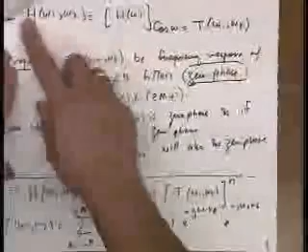So the basic transformation that I proposed, if you can bring the camera down here, okay, and do a rotation. The basic transformation that I proposed was something of this nature. We built the large two-dimensional filter that we're interested in by applying a transformation shown here to a one-dimensional filter.

The idea is that we're very good at designing 1D filters, we know it inside out. We have excellent optimal algorithms that help us design one-dimensional filters optimally. By optimal I mean, given a certain amount of ripple and cutoff frequencies, there are techniques that guarantee you the FIR filter with the lowest number of taps. So we're all good as far as designing h of omega is concerned.

So if we apply this transformation, T of omega1 and omega2 is the frequency response of a smaller filter, T of n1 and n2, given by this expression. Let's say we make T of n1 and n2 just a 3 by 3 filter, and apply this transformation, we get a big filter H.

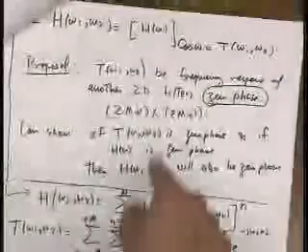We also went through the fact that if little t is zero phase, and if h of omega is zero phase, then H of omega1 and omega2 will be zero phase. And we wrapped up last time's lecture by writing down the steps necessary for designing 2D FIR filters.

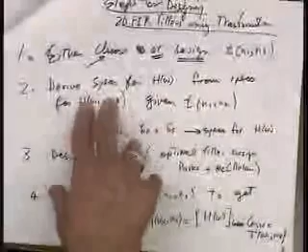So you start by choosing or designing little t — we'll do examples of both today. Given that little t, and given the specs for H of omega1 and omega2, specs stands for specifications, come up with the specifications for h of omega.

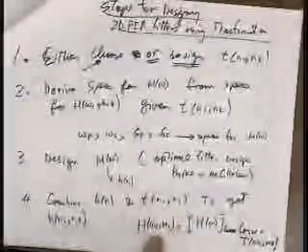Then, hallelujah, we know how to design h of omega even if the specs are tough. We can go to our Remez exchange algorithm in MATLAB and design h of omega given those specs. Then, once we have h of n, we combine it with little t to get the big H of omega1, omega2 using this transformation technique.

So what I'm going to do in today's lecture is first give you an example of these steps for a case where we choose T of n1 and n2 to be the McClellan transformation. McClellan not only came up with this design methodology — step 1, step 2, step 3, step 4 — but also came up with a particular transformation filter shown here, which obviously bears his name.

And this transformation is interesting — it's zero phase.

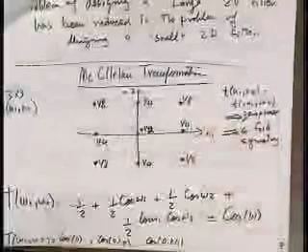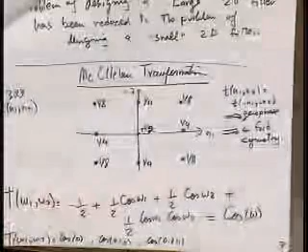It has real coefficients, it's symmetric, and it also has fourfold symmetry. Generally speaking, if this little t filter has fourfold symmetry in the omega 1, omega 2 plane, the chances are that because of the way we do the transformation, the big filter will also have fourfold symmetry. So a lot of the cues as to how the big filter should perform can be translated down to how the little filter looks. In essence, we've transformed the problem of solving a big problem into a little problem, which is designing this T guy. Let me give you an example where this is used.

Okay, if you can just bring that in, thank you. So, example of 2D FIR filter design using the transformation scheme.

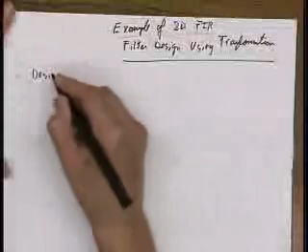Let me see if I can get a slightly better pen here. So suppose that we're asked to design a low-pass filter, LPF, which is supposed to be circularly symmetric. In other words, it's going to have contour requirements as a function of omega 1 and omega 2.

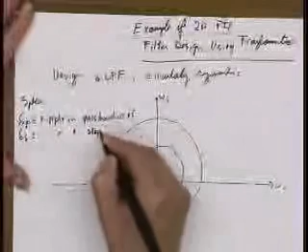It's going to have specs as follows: delta p, the ripple in the passband, is 0.05. Delta s, the ripple in stopband, is 0.025. And C sub p, the passband contour, is just a circle of radius 0.4 pi. C sub s, the stopband contour, is also a circle, of radius 0.5 pi. So this is C sub p here, this is C sub s, a circle of radius 0.4 pi, and a circle of radius 0.5 pi.

Pictorially, the passband looks like this, and the stopband is this region. So we want this filter to pass signals in this frequency band and stop signals in this frequency band.

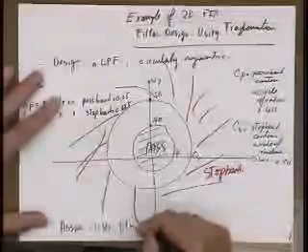In this example, we're just going to follow the steps I just talked about, but we're not going to design T of N1 and N2, the transformation filter. We're just going to assume that the McClellan transformation I showed you is good enough. So what we're going to do is use T of N1 and N2 to be the McClellan transformation.

If you can roll up, please, that'll be good. So our next step is: given this set of specifications in 2D, we have to transform the specs into 1D and figure out what our specifications for our 1D filter h of omega should be. So the goal here is to transform these specs from 2D to 1D. How do we go about doing that? Well, remember what our transformation is.

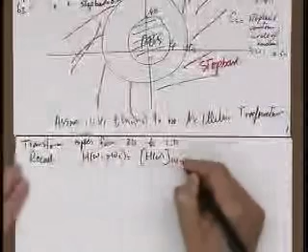It's h of omega 1, omega 2 equals h of omega. Let me write this down. So recall, instead of just talking about it, h of omega 1 and omega 2 is just h of omega with cosine omega replaced by T of omega 1 and omega 2. So what does that mean?

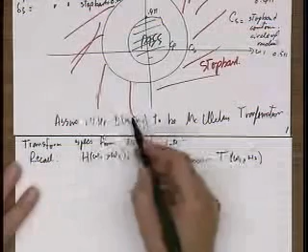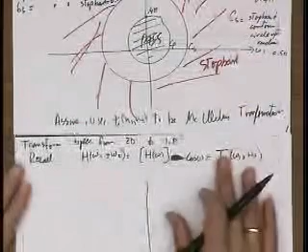Well, it means that, given T to be this McClellan filter, this 3x3 McClellan transformation I talked about, I can plot the isocontours of T of omega 1, omega 2. Okay, so here's...

I'm just kind of exaggerating the amount of wiggles I'm introducing. So for example, this is the isocontour corresponding to 0.1 pi. This is the isocontour corresponding to 0.2 pi. This is 0.3 pi. This is 0.4 pi. And this would be the isocontour corresponding to 0.5 pi.

Those are isocontours of capital T. Yeah, because remember, we've nailed T of N1 and N2 to be this filter, with these taps. So if I plug it into T of omega 1 and omega 2, I get an expression: minus 1/2 plus half cosine omega 1 plus half cosine omega 2 plus 1/2 cosine omega 1 cosine omega 2, equals cosine omega. Because I've nailed my little t to be these, I have an expression for T of omega 1 and omega 2.

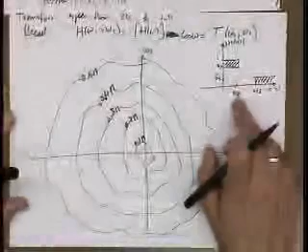So the question I'm asking is how should I pick omega p and omega s? What values should I have? Clearly those need to be influenced by the requirement of my 2D filter. I need to design a lowpass filter where a circle of radius 0.4 pi is my passband. That means I need to ensure the ripple inside a circle of radius 0.4 pi does not exceed 0.05.

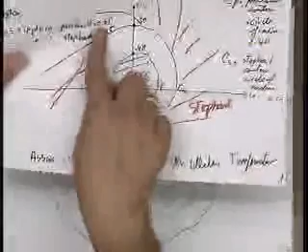So let me for simplicity superimpose this circle of radius 0.4 pi, which I also call c sub p, and also a circle of radius 0.5 pi, which I call c sub s. Superimpose that on top of this diagram. Let me do that in a proper way.

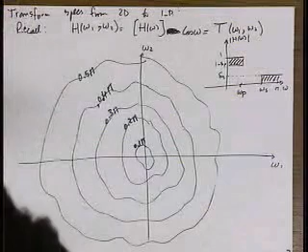Okay, so let's say, I'm going to just draw this randomly. This is c sub p, and this is c sub s. So how should I pick omega p and omega s? Well, these are just circles.

So how should I pick omega p and omega s? Well, clearly I want to pick omega p in such a way that the contour for my h of omega, the contour that corresponds to cosine omega p, is entirely outside of c sub p.

So let me write that down and then I'll justify it. I have to choose omega p in such a way that the isocontour corresponding to omega p is entirely outside c sub p. And why is it that I want to do that?

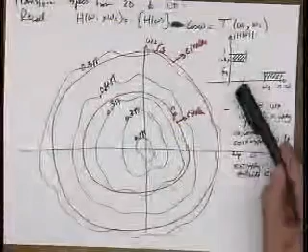Well, because if I pick my omega p that way, and if I make sure that for my one-dimensional filter between 0 and omega p, the filter takes on values between 1 and 1 minus delta p, then by picking omega p to enclose c sub p, I can make sure all points inside c sub p will also have ripple between 1 and 1 minus delta p. Remember, the significance of c sub p is that we need all points inside it to have ripple between 1 and 1 minus delta p.

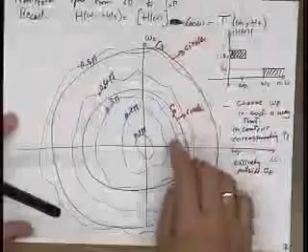So if I pick omega p such that the contour corresponding to it is sometimes inside c sub p and sometimes outside, there might be points inside c sub p that won't satisfy this requirement. So to ensure all points inside the isocontour corresponding to omega p are between 1 and 1 minus delta p, I have to make sure that isocontour completely encircles c sub p. Is that clear? That's the only way I can be sure all points inside c sub p satisfy this constraint.

Question? Yeah, I totally follow what's going on here, but I feel like there wasn't enough motivation leading me to believe this is really going to work. We just talked about this McClellan filter as the ideal case, and... I don't know. The McClellan filter is just one example, and in five minutes I'll give you another example. We don't even start with that—we designed that filter from scratch ourselves, the little transformation filter.

Okay, let me go through this example. Are you trying to say you feel the McClellan filter was pulled out of some hat? Well, is that the problem you have? I'm not saying pulled out of a hat necessarily, but maybe it was kind of a hand wave. Well, in a minute we're just going to throw that away and systematically design our own 3x3 filters, which doesn't even come from McClellan. It's just that McClellan used this in his classic paper as an example. So first we have to start walking before we start running.

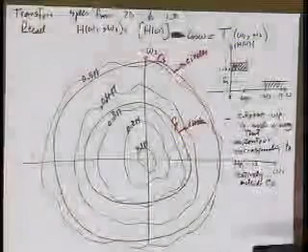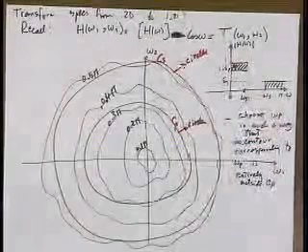You want to pick omega s such that the isocontour corresponding to cosine omega s is barely inside C sub s. In other words, C sub s encircles the cosine omega s. Similarly, choose omega s so that the isocontour corresponding to omega s is barely inside C sub s.

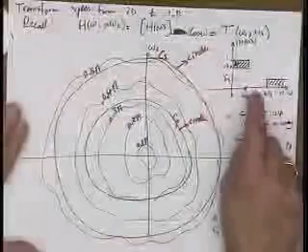The truth is that I can pick omega s to be really small, so what I want to do is pick the largest possible omega s. If I pick omega s too small, I can easily be inside C sub s, but then omega s becomes very close to omega p, making the transition band of my one-dimensional filter really small. That makes the specifications for h of omega very tough, resulting in a long filter. So I want to choose the largest possible omega s so that its corresponding isocontour is barely inside C sub s, without any portion of it getting outside C sub s.

Why is that necessary? Because we want to make sure that for all omegas larger than omega s, our one-dimensional filter will have a ripple smaller than delta s. By doing that, we ensure all points outside the contour corresponding to cosine omega s have ripples smaller than delta s. Because we've chosen C sub s to be outside the isocontour of omega s, all points outside C sub s will also have ripples smaller than delta s.

Again, you want to pick the largest omega s, because if you pick a rather small one, you can satisfy the contour being inside C sub s, but you don't want omega s to come too close to omega p, because that's detrimental. This is the key point of almost all of today's lecture. If you understand this, the rest of the lecture is self-explanatory.

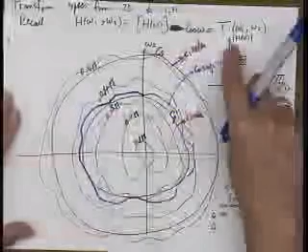So I want to pick omega p, using a different color. I want to pick omega p such that, for example, this happens—it could touch. This is my cosine omega p contour, and I'm designing it so it has to encircle C sub p. Because inside C sub p, everything has to be between 1 and 1 minus delta p. By making the contour cosine omega p encircle C sub p, everything inside the blue contour will also be between 1 and 1 minus delta p.

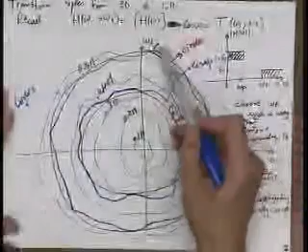As far as the second requirement is concerned, I'm exaggerating here, but bear with me. I want to pick an omega sub s that is just barely—this is the contour corresponding to cosine omega s—such that omega s is large enough to increase the distance between these guys. Because outside of C sub s I'm required to have ripple of delta sub s, by making cosine omega s this way and ensuring that outside of omega s everything is smaller than delta s, I've automatically ensured that everything outside C sub s also has ripple of delta s.

So once we pick the contours that are either inside or outside the pass band or stop band contour, how do you make them have the small ripple that they need? We're getting there. You mean for the two-dimensional filter?

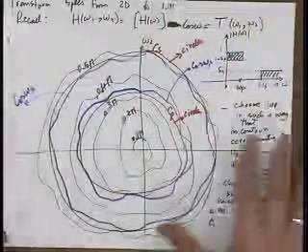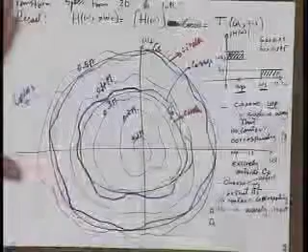Well, the next steps are we pick omega p, we pick omega s this way, and now we have the necessary specs for our H of omega. We know omega p and omega s, and delta p and delta s are going to be the same delta p and delta s from our two-dimensional design. So if delta p here was 0.05 and delta s was 0.025, then we pick delta p to be 0.05, the same as our 2D filter, and delta s is 0.025, the same as from our two-dimensional filter. Now we have the complete set of specifications for H of omega, our one-dimensional filter.

And we can just plug it into the MATLAB one-dimensional optimal filter design routine. You input delta p, delta s, omega p, omega s into the MATLAB one-dimensional filter, and it spits out the FIR filter coefficients for H of omega that satisfies the specs for the one-dimensional case.

So for our example, let me come back here. For this example, the one-dimensional specs are as follows: H of omega, there's an omega p and an omega s. For omega p we need to have this kind of spec, and for omega s all the way to pi we need to have this kind of spec. So delta p is...

Again, we choose the delta p for our one-dimensional filter to be the same delta p as we wanted for our two-dimensional filter, which is 0.05. It's from our 2D spec. And delta s is 0.025, also from our 2D spec.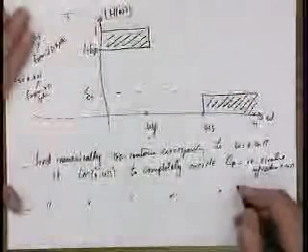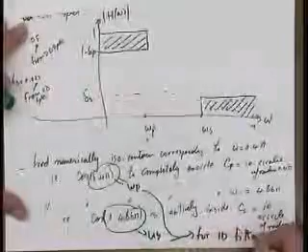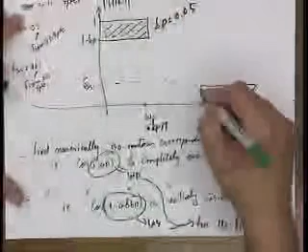And then also find numerically the isocontour corresponding to omega equals 0.486 pi, i.e. cosine 0.486 pi, that is entirely inside C sub S, i.e. a circle of radius 0.5 pi. So this and this are our omega p and omega s for our one-dimensional filter: 0.4 pi and 0.486 pi. And delta p we've already decided is 0.05, and delta s is 0.025.

Now, given all of these things, we can design H of omega using any of your favorite techniques. For example, you can use the Remez exchange algorithm from MATLAB. I'm not sure if MATLAB calls it optimal FIR filter design or Remez exchange algorithm, but they're the same thing. So when I say design H of omega, I mean design H of n, figuring out the filter tap coefficients for our one-dimensional filter H of n.

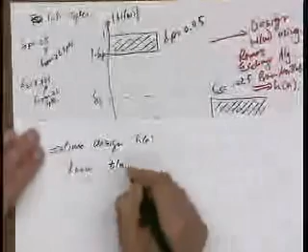And once we have H of n, we can combine it with T of n1 and n2. So once we design H of n and we know T of n1 and n2, we combine these two things together to get H of n1 and n2. The way you do it: by the basic relationship, H of omega 1, omega 2 equals H of omega with cosine omega replaced by T of omega 1 and omega 2. So we know this, plug it into this, and you get H of omega 1, omega 2, and from that you compute the coefficients.

And just to show you that this technique works, for this example, the particular filter that we get - first of all, the isocontours of T of omega 1 and omega 2 look like this. So instead of my stupid hand-drawn thing, this is actually accurate, computer-generated.

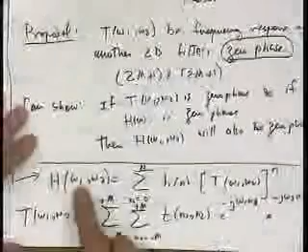We did that last time. Let me flash it on so that you remember it. So if you can zoom in here—this is our h. Let me go back a few steps.

This was our h in terms of the little h's. This is then when we took advantage of the symmetry in h, because we wanted h to be zero phase, to write it down as this. Then we wrote it down as a of n times cosine omega n. Then we wrote it down as b of n times cosine omega to the power of n. You can see how a and b are related, because these are Chebyshev polynomials, and you can write down cosine of omega times n in terms of a polynomial in powers of cosine omega. You can look that up in any textbook or CRC handbook—we went over the Chebyshev polynomials.

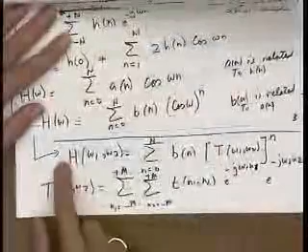So combining all of those things together, you can write down—combining this expression with this expression—you can replace the cosine omega with t, right? So now h of omega 1, omega 2 is related to this thing.

So if I know my h, I know my a's. If I know my h of n here, that lets me know what my a's are. If I know my a's, I know what my b's are, because these are Chebyshev polynomials and those are known. And if I know my b and I plug it in, and if I know my t—because t of omega 1, omega 2 is related to t—if I know my b's and my t's, I can compute what h of n1 and n2 is. Essentially by equating the powers of e to the minus j omega 1 on the right hand side with e to the minus j omega 1 on the left, and vice versa. Is that clear?

Okay, any other questions? Okay, so let's now move on to the slightly more complicated case—example 2. I'm going to use this.

So example 2 for FIR filter design. In this example we want to make a note of the following observation: the shape of the contour for T of n1 and n2, i.e. the shape of the contour for T of omega 1 and omega 2, that transformation filter, is very similar ultimately to the shape of the ultimate filter H of omega 1 and omega 2 we're going to have. Let me see if I can motivate that by showing a picture.

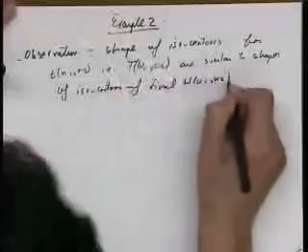And so this motivates us to think: if you don't want to use the given McClellan filter, how do we design T of n1 and n2? So how to, from scratch, design T of n1 and n2.

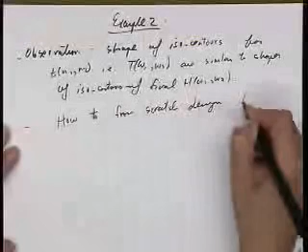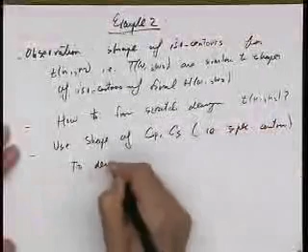And the answer is: use the shape of C sub P and C sub S, that is the specification contours, to design T of N1 and N2. That's the general idea.

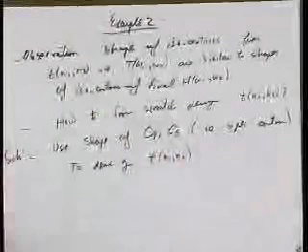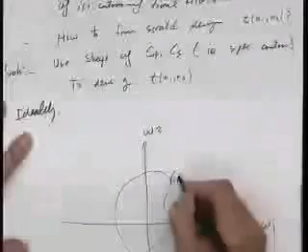So how do we go about doing this? Well, ideally speaking, this is again under ideal conditions. What we want is: if you have omega 1, omega 2, and some sort of C sub P and some sort of C sub S with delta P specification here, delta S specification here, ideally you want the contour corresponding to cosine omega p, and if the one-dimensional filter that we design, H of omega, is going to have something called omega p and omega s, like this.

Ideally, what we want is that cosine omega p be equal to the transformation T of omega 1 and omega 2. We want this relationship to hold true for all omega 1 and omega 2 in C sub P, in this contour. So this is ideally. Furthermore, ideally we want the same thing to hold true at the stopband: cosine omega s, which is T of omega 1 and omega 2. We want that to hold true for all omega 1 and omega 2 in C sub s.

So in other words, we don't want to play this game of choosing cosine omega p with omega p such that the contour corresponding to cosine omega p is entirely outside C sub p. We want this blue curve to entirely coincide with the red curve, the C sub p curve. And we want this other blue curve here, the cosine omega s contour, to entirely coincide with the C sub s contour, the red circle.

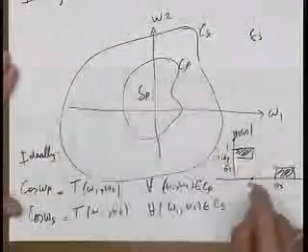Of course, that's a bit of wishful thinking, but that's what we're trying to strive towards. And in addition, not only do we want cosine omega p to correspond to this and cosine omega s to correspond to that, we want all the points inside the passband contour to correspond to values of omega between 0 and omega p. So furthermore, let's roll up just a little bit.

So furthermore, it would be nice, I'm not saying we could have it, but it would be nice if we could have the following relation hold true: for cosine omega, for omega between 0 and omega p, we want T of omega 1 and omega 2 for all the omega 1s and omega 2s inside C sub p to correspond to omega values between 0 and omega p.

What I'm trying to say is that as I traverse my omega axis from 0 to omega p, I want all these frequency points in one dimension to correspond to all the omega 1s and omega 2s inside c sub p.

Not only do I want cosine omega p to correspond on the contour to c sub p, and this isocontour to be the same as c sub s, I want all the points inside c sub p to only correspond to 0 and omega p, and all the points

outside c sub s here to correspond to omega ranging between omega s and pi. So let me write that down also. I want all the cosine omegas for omega between pi and omega s to correspond to values of omega 1 and omega 2, where omega 1 and omega 2 are outside c sub s.

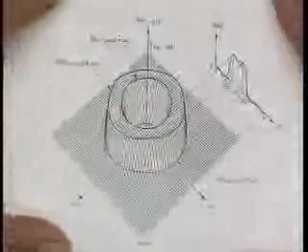So pictorially, maybe I can show this figure, zoom in as much as you possibly can. I realize this is a bandpass example, and what we're talking about is a low pass, but nevertheless it drives the point. So this is h of omega as a function of omega. This is the omega 1, omega 2 plane. This is a two-dimensional filter that we design, right?

Basically, with the transformation design, for example, the contour corresponding to omega naught prime in this figure, shown by g of omega 1 omega 2 equals omega naught prime, which is this contour here, they're all going to take on the same value as omega naught prime as h of omega took at omega equals omega naught prime.

Furthermore, if I go to omega 1 prime, which in 2D corresponds to this other contour shown here, all these points are going to take on the same height as h of omega did at omega 1 prime. Hopefully all the frequencies between omega naught prime and omega 1 prime, all the isocontours in between are going to correspond to the isocontours in here. And so the height variation in between these contours here is going to correspond to the height variation in h of omega here. Is that clear?

This actually has nothing to do with the point I was talking about earlier. It's just a nice figure that I feel sorry not to have shown. I should have probably shown it right at the beginning of the class, or even—yeah, question.

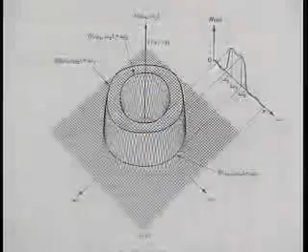Yeah, essentially that's what's happening: the transformation is cosine omega, isocontours corresponding to cosine omega equals this thing is going to have the same height variation. Exactly, the height variation here is going to be reflected by the height variation here. And how that is, is through the isocontours given by cosine omega equals T of omega 1 and omega 2, right?

So that's why the shape of the contours here is very much dominated by the shape of the contours in T of n1 and n2. It's just as to which contour corresponds to what value, what height, that's what h of omega dictates through that relationship, cosine omega equals T of omega 1 omega 2.

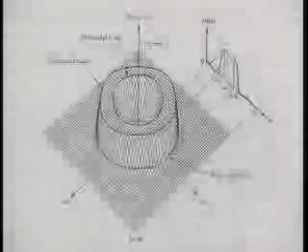This is just a nice picture. It doesn't directly correspond to what I was talking about. I think it's never too late to talk about it though. Is the point I was making clear here?

For example, omega 2 prime, which corresponds to this isocontour here, the height of that isocontour for the two-dimensional filter is the same as the height of h of omega at omega 2 prime, which is a small value. So that's why this is low here.

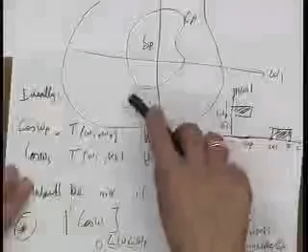Coming back to this, what I'm arguing is that in this general picture, it would be good if the cosine omega p isocontour exactly matches C sub p, and the cosine omega s contour exactly matches C sub s. All points between 0 and omega p correspond to inside of C sub p, and all points between omega s and pi correspond to the contours outside of C sub s. These are all nice things to have, but let's stop daydreaming.

So the question is, given all these niceties, how do we design T of n1 and n2 to make all these nice things happen? This is the degree of freedom we have. The coefficients of T of n1 and n2 are the knobs we can turn to make some of this wishful thinking come true.

Here's my four-point proposal for designing T of n1 and n2. So, steps for designing T of n1 and n2, assuming that we don't want to use a canned McClellan filter. We don't want to use a brownie mix or a chocolate chip cookie mix. We want to design it from scratch, whatever that takes. I'm afraid I don't really know what goes into any of those mixes, so I can't give you a good analogy. I think it's flour. Must be flour.

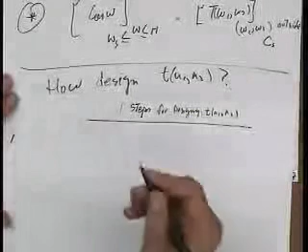Step 1.1: assume some sort of shape, size, and region of support for T of n1 and n2. This could come from the specs. For example, we might want to say, okay, we're just going to make T to be 3 by 3 and no more than that, and we're going to make it symmetric or have fourfold symmetry. If our final filter is going to have fourfold symmetry, we might as well make T have fourfold symmetry.

Then step 1.2: impose a certain amount of constraints, and what that does is reduce the number of unknowns. I'll go through a concrete example to show this in just a second.

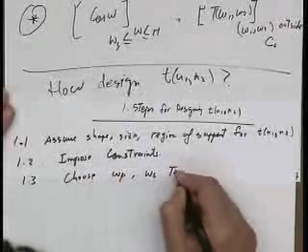Step number 3: choose omega p and omega s tentatively in our 1D design, such that cosine omega p is approximately equal to T of omega 1 and omega 2 for all omega 1 and omega 2 in C sub p. It can't be exactly, but approximately. And such that cosine omega s is approximately equal to T of omega 1 and omega 2 for all omega 1 and omega 2 in C sub s. So these two are two of our requirements in our wish list.

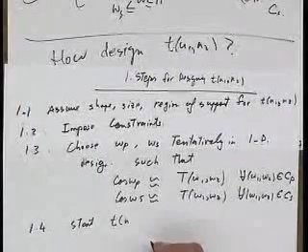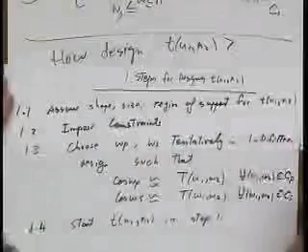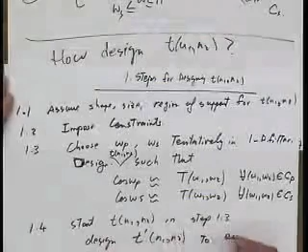And step 1.4: start with T of n1 and n2 from step 1.3. To choose omega p and omega s points tentatively in our 1D filter design, design T of n1 and n2 such that this relationship holds true. So coming out of step 1.3, you already have a tentative design for T of n1 and n2. Then start with that T of n1 and n2 and design a slightly modified version of it, which I call T prime of n1 and n2, to ensure that those starred relationships in my wish list are satisfied.

This looks awfully abstract, so before it scares the daylight out of you, let me give you an example to make this a bit more concrete.

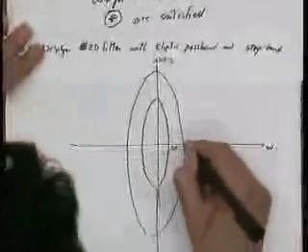Here's an example. Suppose that I want to design a 2D filter with elliptic passband and stop bands. My specs in the omega 1, omega 2 plane will look like this: 0.5 pi here, 0.6 pi here, 0.6 pi here, and 0.7 pi here. I can already understand why you'd want to shoot me, because my figure is entirely out of scale, but just bear with me. Pretend these are ellipses -- if this is 0.5 pi, that's not 0.6 pi, but just pretend it is. Delta p is 0.08 and delta s is 0.08, and this is our 2D spec.

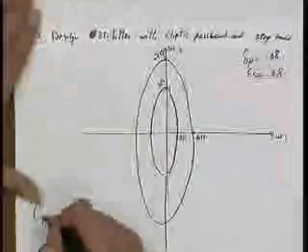Mathematically, C sub p is given by an ellipse with major and minor axes given by 0.5 pi and 0.6 pi, so it's omega 1 over 0.5 pi squared plus omega 2 over 0.6 pi squared equals 1. And C sub s is omega 1 over 0.6 pi squared plus omega 2 over 0.7 pi squared equals 1. So these are the mathematical shapes of our contours. That's it.

This is the spec, and we're now going to go through steps 1.1 through 1.4 to design the T that does the job with this thing, and ultimately to design the H of omega 1 and omega 2 that does the job with this. So if you can roll up, please.

So what do we do next? Well, start with step 1.1. Assume some sort of a shape, size, and region of support for our T of n1 and n2. We're going to assume the region of support is 3 by 3. That means we have 9 unknowns.

And if I were to, as a function of n1 and n2, write down the coefficients for T, I'm going to have 9 unknowns that I call A, B, C, D, E, F, G, H, and I. So you can imagine I would have A, B, C, D, E, F, G, H, I, just nine coefficients for different values.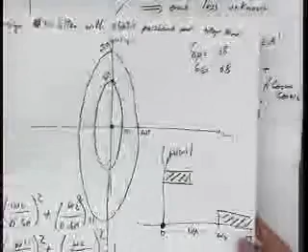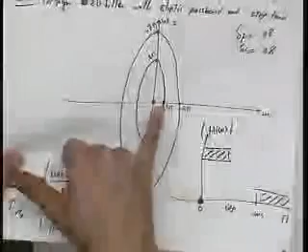Moving to step 1.3, which is: choose omega p and omega s in 1D kind of arbitrarily. Staring at this diagram, what do you think we ought to pick for omega p and omega s? How about if I just pick omega p to be 0.5 pi and omega s 0.6 pi? I could also go omega p 0.6 pi, omega s 0.7 pi. It doesn't make too much of a difference. But for the sake of argument, say we pick omega p to be 0.5 pi and omega s to be 0.6 pi.

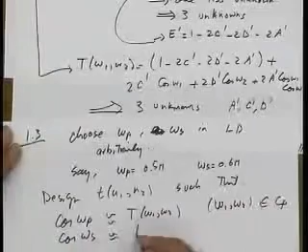Step 1.3 says after you pick these omega p's and omega s's, design T such that these two conditions hold true. In other words, the isocontour at omega p corresponds to the passband contour C sub p, and the isocontour at omega s corresponds to all the points in omega 1 and omega 2 that are members of the stop band C sub s. So design T of n1 and n2 such that cosine omega p is approximately T of omega 1, omega 2 for all omega 1, omega 2 in C sub p, and furthermore cosine omega s is approximately equal to T of omega 1, omega 2 for all omega 1, omega 2 in C sub s.

This is my wishful thinking part, the daydreaming part. How do I go about doing that? It's a standard technique in optimization. I'm going to come up with an error term, error sub p, E sub p, which is the difference between this and this squared, integrated over omega 1 and omega 2 along this contour, to be minimized. So I want to minimize an error defined as the double integral of the square of the difference between T and cosine omega p, over d omega 1 d omega 2, where this double integral is over a particular contour, omega 1 and omega 2 in C sub p. For all the points on the passband contour, you want to minimize this quantity. Why am I squaring it? Because if I don't square it, the pluses cancel the minuses, and the two things won't be close to each other. Standard practice, and this makes me get close to satisfying the top condition.

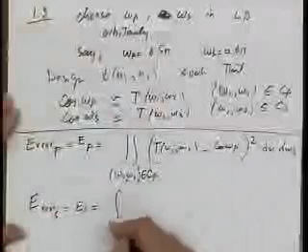And for the bottom condition, I can do the similar thing. Error sub s, E sub s, is the double integral over omega 1 and omega 2 in C sub s of the same thing squared, d omega 1 d omega 2, where it's T of omega 1, omega 2 minus cosine omega s. I'm going to convince you this is not a very difficult optimization job. If I want to minimize error sub p and error sub s, with respect to what?

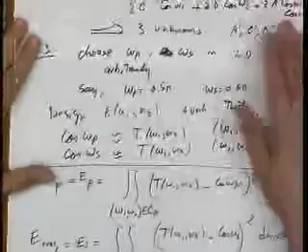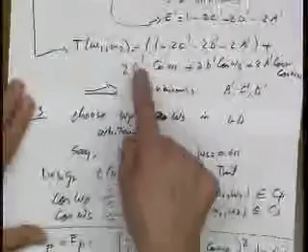My unknowns are A prime, C prime, D prime. Remember, T of omega 1 and omega 2 is linear in terms of A prime, C prime, and D prime. So if I have a quantity that I want to minimize, essentially I want to minimize E sub P and E sub S with respect to A prime, C prime, and D prime. These are my unknowns, right? That's the only knobs I have to change. I have no other control over the universe other than A prime, C prime, and D prime.

And how does one minimize something with respect to something else? You take the derivative and set it equal to 0. So what that means is that dEP over dA prime is equal to 0. dEP with respect to dC prime is 0. dEP with respect to dD prime is equal to 0, the partials. And the same thing for E sub S. dE sub S dA prime is equal to 0. dE sub S dC prime is equal to 0. dE sub S dD prime is equal to 0.

And the next question you ask yourself is, well, is that an easy optimization to do? I'll argue that it's extremely easy. Why? Because T is linear in A prime, C prime, D prime. If you don't believe it, stare at this. T is linear in C prime, D prime, A prime. In other words, there's no C prime squared, no D prime squared, no A prime squared, not even A prime times D prime. There's no square root of A prime. It's linear in A prime, right? And C prime and D prime.

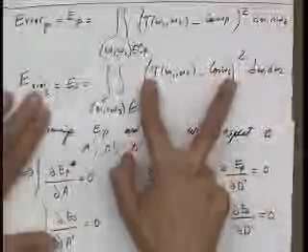Therefore, this quantity inside the parentheses here is quadratic with respect to A prime, C prime, D prime. And if I take the derivative of this term with respect to A prime, because of the linearity, I can bring the derivative of E sub P inside this integral. So if this thing is quadratic in A prime, C prime, D prime, and I take the derivative with respect to A prime, C prime, D prime, that thing is going to be linear in A prime, C prime, D prime. If something is quadratic, quadratic means power of 2. If this quantity here is quadratic in A prime, C prime, D prime, and I take the derivative with respect to them, the final answer is going to be linear in A prime, C prime, D prime.

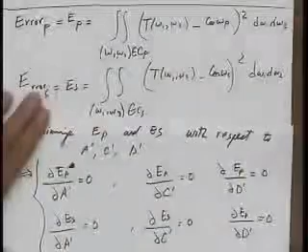And therefore, if I'm setting this thing equal to 0, the derivative of E sub P equal to 0, it's a linear term equal to 0, another term equal to linear term equal to 0. So at the end, I have a linear system of equations that I'm setting equal to 0, and that's very easy to solve. So let me provide you with a little bit more detail. Did everybody follow that intuitive discussion?

Okay, so let's just write that down. We know that T of omega 1, omega 2 is linear in A prime, C prime, and D prime. And therefore, T of omega 1 comma omega 2 minus cosine omega P squared is quadratic in A prime, C prime, D prime.

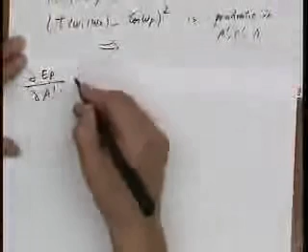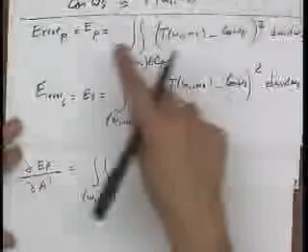What that means is that dEP dA prime is equal to the double integral of omega 1 and omega 2. So remember, I'm taking a derivative of E sub P with respect to A prime. I can just bring in the A prime as T of omega 1, omega 2 minus cosine omega P squared, d omega 1 d omega 2. And I can apply now the chain rule.

dEP dA prime is equal to, this is omega 1 and omega 2 in C sub P. So it's double integral of omega 1 and omega 2 in C sub P. So how do I take the derivative of that? Well, it's twice T of omega 1 comma omega 2 minus cosine omega P, and then times the derivative of this thing coming down here, d omega 1 d omega 2.

So because T is linear with respect to A prime, I'm going to make all my arguments with respect to A prime. The same thing holds true about C prime and D prime, all of these things, and the same thing holds true about E sub S. Because T is linear with respect to A prime, that means that d/dA prime of that thing is a constant.

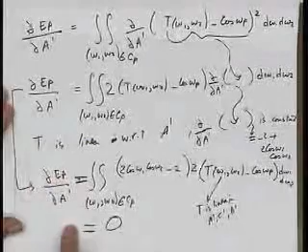I have 6 of them. Why? Because I have dEp over dA prime, dC prime, dD prime, that's 3 of them, and then E sub S, so that's 6 total. So bottom line is that I have 6 linear systems of equations, and how many unknowns? 3 unknowns.

And how do I solve that? Apply linear least squares, right? Because it's overdetermined. So apply some sort of simple method like linear least squares, and that gives you A prime, C prime, D prime.

And then from there you can get E prime, from there you can get D prime, then from there you get T of omega 1 and omega 2. I'm not going to be able to finish this argument here, but the reason I have to at least give you a one-minute explanation is why we're not done, why there's a need to go to step 1.4, which is refining T. And the best way to do that is for me to just show you the isocontours corresponding, for this example anyway, to T of omega 1 and omega 2.

And it's shown here. If you can zoom in, please. Zoom in. Okay, great. So now that I computed my T of omega 1 and omega 2, my transformation is: cosine omega, h of omega 1 omega 2 is equal to h of omega, where in h of omega I replace cosine omega with T of omega 1, omega 2, right?

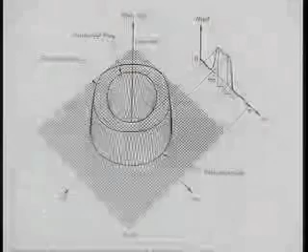...of my final h of omega 1 and omega 2. And if there are some points in this two-dimensional frequency plane, omega 1 and omega 2, that don't correspond to any omega here, all hell could break loose there. The height for these guys can be anything. So it's very important for these T guys...